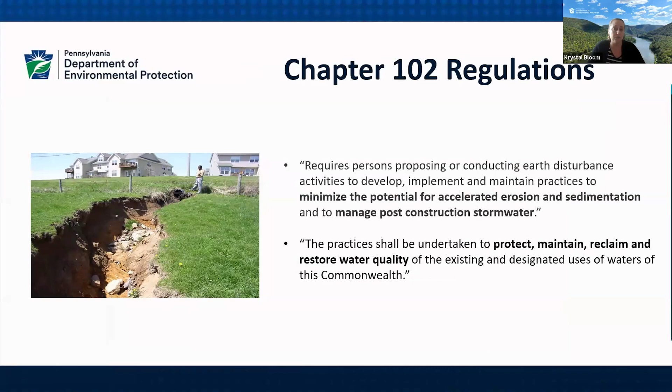So the first goal of Chapter 102 is to minimize accelerated erosion and sedimentation caused by earth disturbance activities. So what's so bad about a little bit of mud? Sediment is the #1 pollutant by volume in Pennsylvania's streams. It's considered a pollutant for numerous reasons, one of the main concerns being that other pollutants can hitch a ride with the sediment-laden runoff and impact downstream aquatic ecosystems, recreational activities, and human and animal safety. Sediment entering stormwater degrades the quality of water for everyone and everything.

Sediment fills up storm drains, which carry water away from roads and homes, increasing the potential for flooding. Sedimentation can increase the cost of treating drinking water and can result in odor and taste problems. Sediment deposits in rivers and streams can alter the flow of water and reduce water depth, which makes navigation and recreational use more difficult and less appealing.

In addition, algal blooms and sediment-laden streams also prevent animals from seeking food. Murky water prevents natural vegetation from growing in water, which affects the food chain. Sediment can clog fish gills, reduce resistance to disease, lower growth rates, and affect fish egg and larvae development. Sediment in stream beds also disrupts the natural food chain by destroying the habitat where the smallest stream organisms live, which can cause fish starvation.

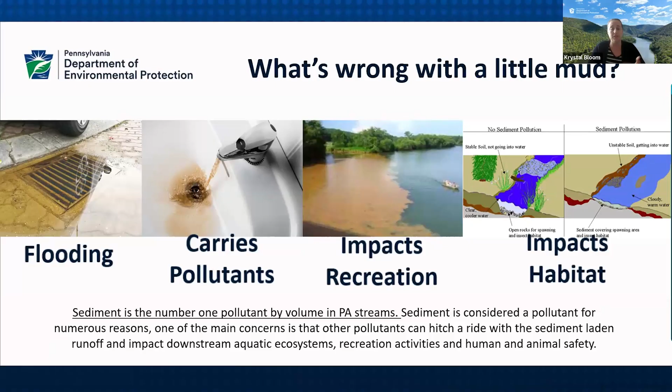Sedimentation of a stream bed can cause the water to be shallower, the water warms up, and then actually holds less oxygen for aquatic life to survive. So in summary, preventing erosion and sedimentation during construction can help prevent all of these things from happening.

So with certain exceptions, Chapter 102 and federal regulations require National Pollutant Discharge Elimination System, or NPDES, permits for construction projects that involve at least 1 acre of earth disturbance over the life of a project. So what is meant by life of the project? You probably have also heard this referred to as Common Plan of Development, which is a contiguous area where multiple construction activities may be taking place at different times on different schedules under one common plan. Common Plan of Development is important to prevent circumvention of the regulations and permitting, thus helping to ensure proper control of stormwater generated by the site activities.

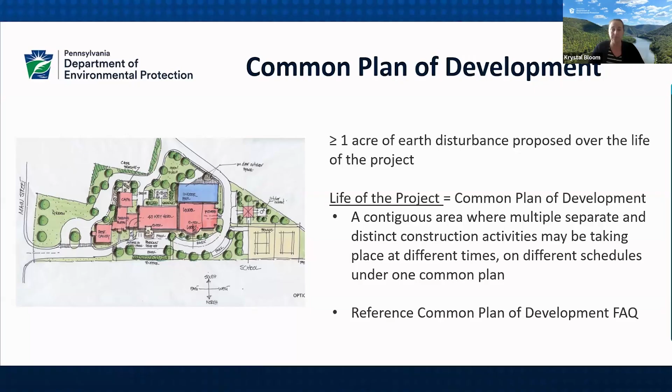There are 2 types of NPDES permits, general and individual. General permits are issued on a statewide basis every 5 years, and applicants seek coverage under those statewide permits. Individual permits are issued on a project-by-project basis with permit conditions that may be specific to that project site.

At this time, there are 3 construction stormwater NPDES permits that could be used for housing development projects. The first NPDES permit is known as the PAG-01 General Permit. The PAG-01 was issued for the first time in 2022 and is intended for small projects under 5 acres of earth disturbance, such as a single-family home, that are expected to involve low environmental risk.

The PAG-01 has a simplified application process and shorter application review period than any other NPDES permit. However, there are specific eligibility requirements that must be met in order to obtain coverage under this general permit, such as limits on the amount of impervious area. Everyone with PAG-01 coverage is subject to the same terms and conditions, including the current expiration date of February 28th, 2027, regardless of when permit coverage is granted. That's the case for all general permit coverage. They expire at exactly the same time.

Now, the second permit might be one that you guys are all a little bit more familiar with, and that is the PAG-02 General Permit. The PAG-02 General Permit was reissued and went into effect on December 8th, 2024. Similar to the PAG-01, the permit conditions and expiration date of December 7th, 2029 are the same for everyone covered under the PAG-02. Again, this general permit also has specific eligibility requirements to qualify for coverage.

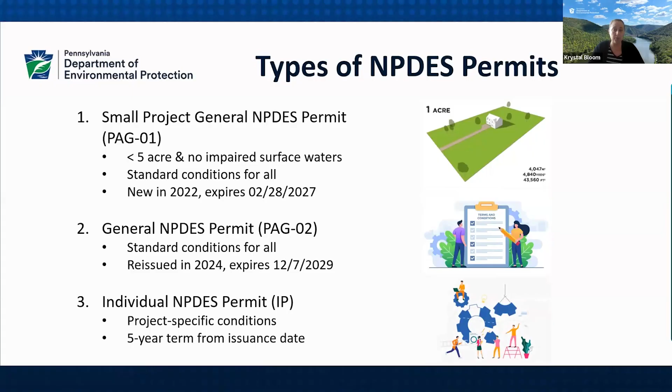Which brings us to the third permit type, the individual NPDES permit. So unlike the general permits, this permit is issued on an individual basis. Note that there are more individual NPDES permit types outside of the Chapter 102 Construction Stormwater Program. Those other NPDES permit types cover things like sewage, industrial stormwater, but there is only this one permit for construction stormwater. So when we're talking about the individual permit from a 102 perspective, this is the one that we're talking about. This permit has similar standard conditions that are within the general permits, but may also have other special conditions based on the environmental conditions and proposed activities at the site.

There are several reasons why a project may have an individual permit, but generally, if a project does not meet the eligibility requirements of the 2 general permits, they will need to apply for an individual permit. The most common reason for this is because the project is located in a special protection watershed, and the second is probably site contamination. In addition, an individual permit is issued with its own permit term, which is 5 years from the date of issuance.

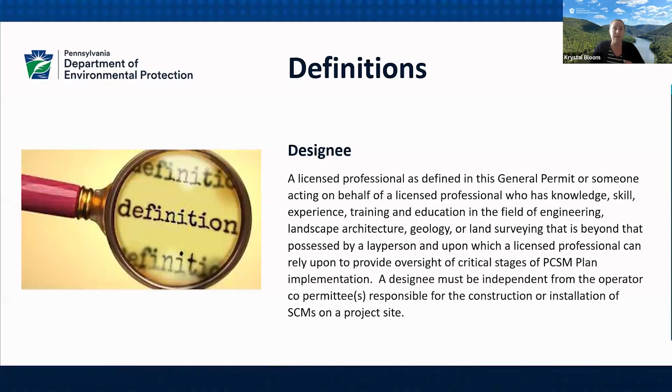The permit also states that the designee must be independent from the operator co-permittee responsible for the construction and installation of SCMs on site. So essentially, this means that if a licensed professional is going to designate someone to provide the oversight of critical stages, it has to be someone that has knowledge and training to do so, and that person must be independent of the folks completing the installation. Basically, we're just trying to avoid the situation where somebody is essentially checking their own work.

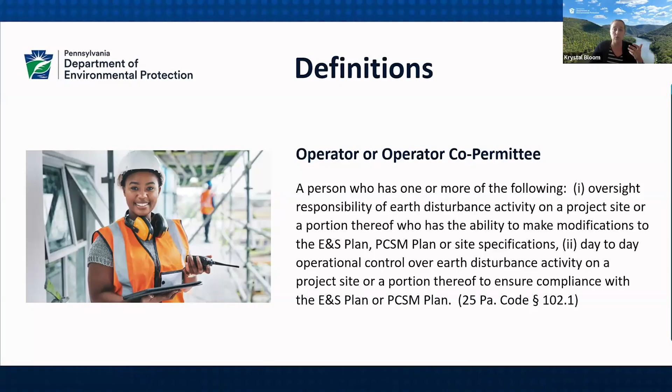Another definition that we've added is operator co-permittee. So previous permits referred to both an operator and a co-applicant as simply co-permittees. The operator co-permittee definition now distinguishes between the two terms and is specific to operators who become co-permittees because of the work they're conducting on a project site, whereas co-applicants are those that actually have their name on the permit. So if somebody is an applicant co-permittee, their name would be on the permit. If they're an operator co-permittee, then they are obviously responsible while they're on the site, but their name is not on the permit itself.

The DEP has also included definitions for record drawings. Under the 102 regulations, record drawings must be provided to the responsible party identified to carry out the long-term operation and maintenance of stormwater control measures, or SCMs. DEP has defined the term to ensure permittees understand what is expected for record drawings. In addition, record drawings also have additional uses under the permit, as we'll discuss later in the presentation.

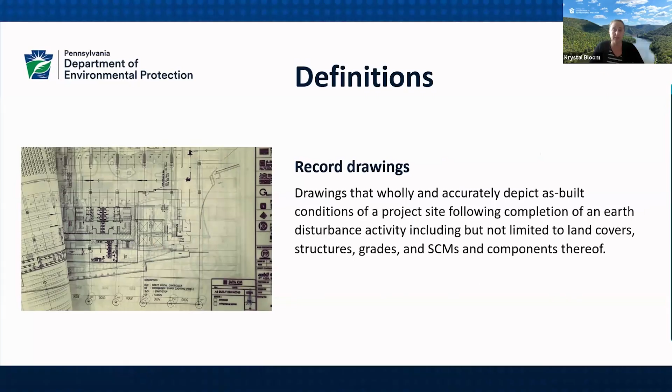Sorry about that. So permit requirement updates also include additional guidelines for construction dewatering discharges. These discharges would include those from the dewatering of trenches and excavations, but they do not apply to discharges from basins or traps. The goal of the dewatering requirements has always been to ensure that discharges from dewatering activities are treated before they reach the surface water.

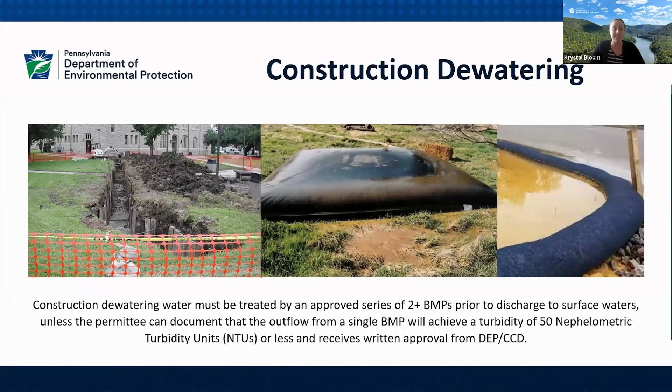This can be done by utilizing upland vegetated areas of the project site to infiltrate construction dewatering water. If this condition is not available, the dewatering discharge would need to be treated with an approved series of 2 or more BMPs prior to discharge to surface waters. However, if the permittee can document that the outflow from a single BMP will achieve a turbidity of 50 NTUs or less, they can request written approval from DEP or Conservation District. This new requirement aligns with EPA's Construction General Permit, which is why this was included.

There is also a new requirement for post-construction testing to determine whether as-built infiltration rates for infiltration SCMs are within a tolerance range of the design infiltration rate. This confirmation testing became a requirement as of December 8th, 2025. So this testing is necessary anytime the area of an infiltration SCM has not been protected, say, for example, the area was compacted. The licensed professional is expected to make this determination, but DEP or a conservation district may also direct the permittee to conduct testing if they believe there are concerns.

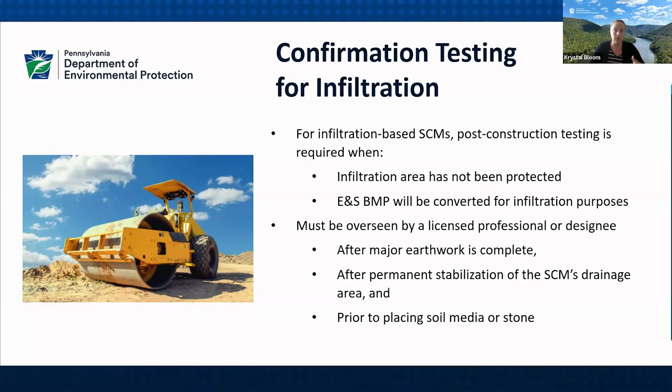The construction confirmation testing for infiltration capacity can be performed generally one of 3 ways: either a simulated runoff test using a ponded depth of no less than 6 inches within the SCM, an inspection during and after a storm event that produces a ponding depth of no less than 6 inches within the SCM, or infiltration testing using acceptable methods from Pennsylvania's Stormwater BMP manual as amended and updated. Yes, that includes the future finalization of the PCSM manual. Note that while percolation tests are in the Stormwater BMP manual, DEP does not consider a perc test an appropriate method for confirmation testing.

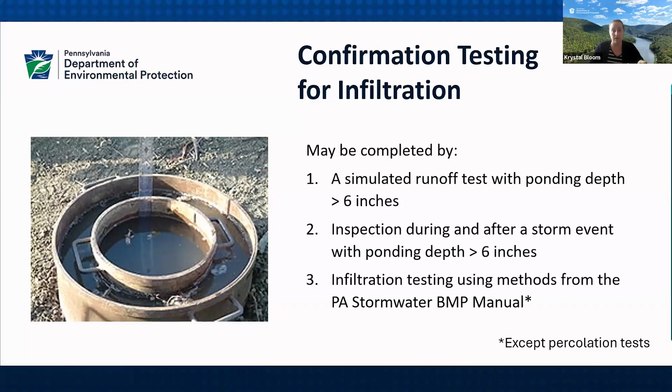With confirmation testing, the licensed professional must evaluate the confirmation testing results and notify the permittee that the infiltration SCM meets the purpose and intent of the approved PCSM plan without overflowing at the storm event the SCM is designed to manage and will protect waters of the Commonwealth. The permittee should not proceed to complete construction of the SCM until this notification is given.

In the event the licensed professional determines that the SCM will not function as designed, the permittee must then implement corrective measures under the direction of the licensed professional and retest prior to the completion of the SCM. If the licensed professional recommends changes to the dimensions, location, or type of SCM, the permittee must notify DEP or the Conservation District prior to implementing the changes.

These confirmation testing results must be submitted with the SCM construction certification form, which we'll get to in a few minutes. But because this is a brand new requirement, I very much urge you to read the requirements that are laid out in the permit conditions, as well as reviewing the instructions that come with the SCM construction certification form. We've done our best to try to make these new requirements as clear as possible.

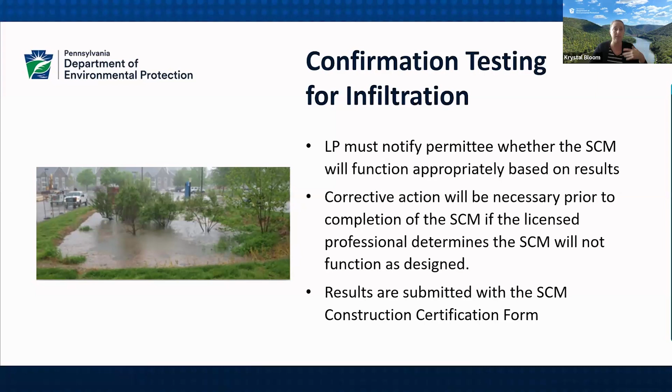So next, we're going to start by discussing some of the updated or new forms that came about due to the permit changes related to the 2024 PAG-02. In some cases, the form updates are not associated with changes in the permit requirements, but rather to provide some clarity to simplify or assist in the process. We'll touch on a few of these updates today, but for more information, please refer to the lessons that are available in Clean Water Academy, because there's a lot, right? So we're not going to have time to take a deep dive into all of them.

All right. So as of December 8th, 2025, those completing the VSIR need to be qualified. This change was made to ensure consistency with EPA's construction general permit. The 2024 PAG-02 includes a requirement for site inspections to be conducted by qualified personnel. There are 3 options to demonstrate qualification to conduct site inspections. The first is completion of the Qualified Site Inspector Training Program within DEP's Clean Water Academy. This training will need to be completed every 2 years.

Second, if you hold a valid CPESC or CSSWI certification, that can be presented as a qualification also. Lastly is submission of documentation of training and experience to the permitting agency, which would require written approval prior to conducting site inspections. So it's important to note that for those that complete VSIRs for PennDOT, the department's QVSI course will need to be completed along with the additional PennDOT module, and PennDOT will not accept alternative qualification. So if you're going to be conducting those VSIRs for PennDOT, then you need to take the Qualified Site Inspector Training Program on Clean Water Academy.

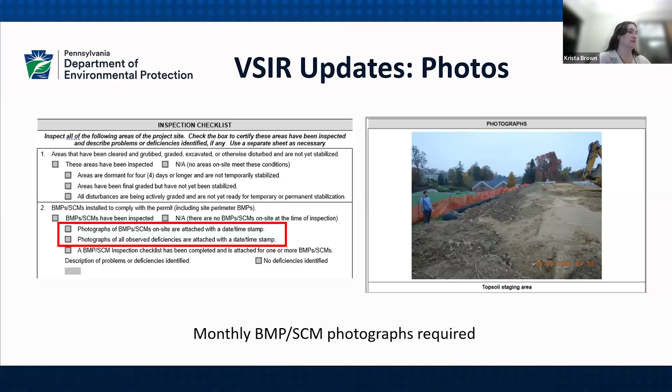Okay, so several updates were also made to the visual site inspection report itself. One of the more significant changes is the requirement to take colored photographs of all E&S and PCSM SCMs on the project site at least monthly, and when deficiencies in BMPs and SCMs are identified. While full exemption to the photo requirement will not be entertained, it may be possible to develop an alternative photo schedule based on the conditions of the site. This request must be made in writing to the Conservation District for approval. Keep in mind, if this alternative is approved, it can be rescinded by DEP or the district at any time if non-compliance is observed. Notification will be provided to the permittee in writing if this ends up being the case.

Another update we would like to touch on in more detail is a change to the procedures for co-permittees. So those that meet the definition of an operator under 102.1 are considered co-permittees under 102.5(h). So previously, co-permittees were acknowledged and removed via a co-permittee acknowledgement and release form. Permittees covered under the 2024 PAG-02 and new IPs or those with updated permit conditions after December 7, 2024 will no longer submit these forms. Rather, they will identify operators that come and go via the visual site inspection report. For PAG-02s and IPs that were issued before December 8, 2024 that haven't been revised or modified, co-permittee acknowledgement and release forms will still need to be submitted, but these forms will eventually be retired once their use is no longer required by these permit types.

So the 2019 PAG-02 General Permit required recording of a legal instrument for disclosing PCSM SCMs within 45 days of permit issuance. Proof of the submission was required to be provided with the Notice of Termination, or NOT, or transfer application if applicable. However, what we were finding is that this just wasn't happening. People were not completing the recording, and we weren't finding out about it until the NOT time.

So now the full recording and proof of recording will need to be provided to the office that approved coverage prior to scheduling the pre-construction meeting, with the exception of projects conducted for the benefit of a public utility as defined in the Public Utility Code and other projects that receive prior written approval from DEP or a county conservation district. For utility projects and others with prior written approval, the instrument recording must be completed within 45 days of permit issuance. Once submitted, the information will be reviewed to ensure all the required information was included in the recording.

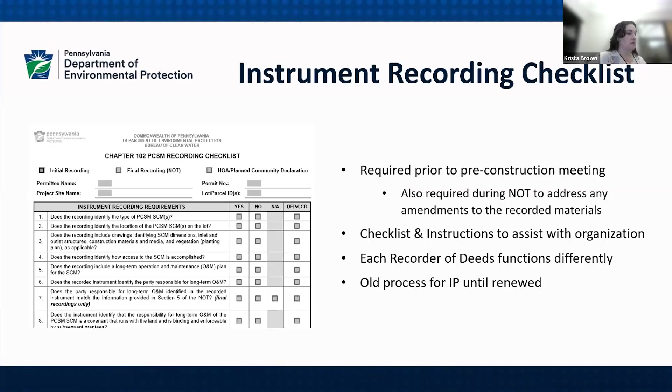NPDES permits associated with earth disturbance activity now require submittal of an annual report. The new annual report form is short but useful, as it will assist with the tracking of a project status as well as speed up permit terminations. As we have been saying, this reporting requirement will also apply to new individual permits issued after December 7, 2024, and eventually existing individual permits upon renewal or major amendments issued.

The reporting period for existing permittees will be October 1st to September 30th of each year within the permit term. However, new permittees will have at least one full year of permit coverage before the requirement to submit an annual report begins. The permittee must submit an annual report form to the permitting agency on December 7th of each year. For those of you that had PAG-02 permit coverage before December 8, 2024, your first annual report was due this past December 7th. So if you haven't submitted it yet, please do so.

All right, next up, we have the SCM construction certification form. This form is to assist with project status and permit termination. Again, a lot of these things were put in place to try to make sure that when it came to NOT time, we have all the information that we needed to gather throughout the life of the project. So this form requires a licensed professional or designee to report on the installation of stormwater control measures, including inspections conducted and whether the SCM will function as designed.

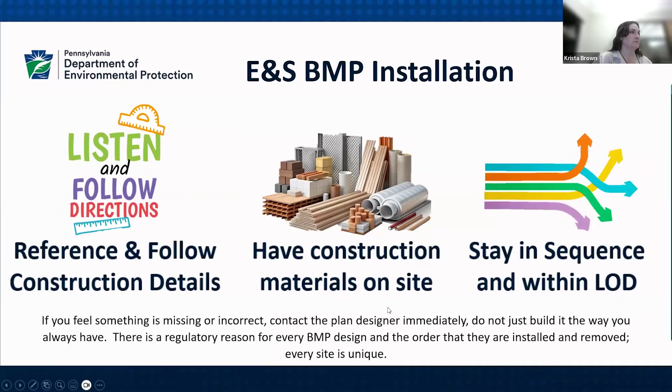The same standards that we just discussed also apply to the PCSM installation. Reference and follow your construction details, stay in sequence, and make sure all materials are on site and ready to go. There are other factors to think about to stay in compliance with the PCSM plan. Many involve thinking ahead to avoid additional costs and delays.

Know where your proposed infiltration areas are located before accessing the site. Most likely your plan required the marking of these areas so they don't end up compacted. Compaction of infiltration areas causes the need for confirmation testing, as Krista discussed earlier. So this adds cost and time to the project and could also limit what can then be built on site. In addition, the PCSM plan also proposes non-structural SCMs that you may not even be aware of.

So these can be as simple as protecting a forested area or natural stormwater conveyances. These practices seem simple, but that is the point, right? The permittee is getting credit for doing the right thing and preserving beneficial features. If these features are impacted, it could cause the need for the redesign of the entire PCSM plan, which will cause project delays and additional costs.

The licensed professional or their designee must be on site during the implementation of critical stages. So it is important that there is a plan in place to get the LP on site as soon as possible to prevent construction delays.

Before your contractor leaves the site, be sure that the SCMs that they installed actually function per the plan. Ensure that required confirmation testing has been completed and that the LP has signed off on the SCM certification. But keep in mind that the SCMs will need to be maintained until the responsibility can be transferred at the time of NOT approval.

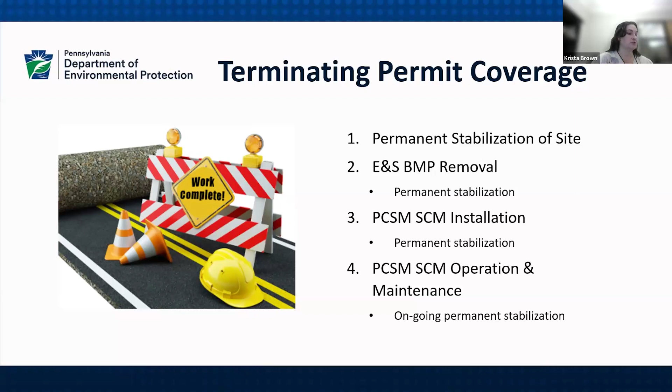The NOT and attachments are first reviewed for completeness and consistency with the approved plans and permit. As with most forms, there is a checklist which assists the permittee in providing a complete NOT submission. Detailed instructions are also provided with the NOT form, providing guidance to get the application complete with the initial submission. Revised recording is required if there were changes to the responsible party or the SCM type, design, drainage area, impervious area, or operation and maintenance requirements.

If the NOT is found to be incomplete, the permitting agency will provide a letter with the deficiencies that need to be addressed before the NOT process will continue. However, just as during the permit review, if there are minor deficiencies, the permitting agency may still choose to schedule the final inspection with the intention that the issues will be quickly resolved.

A final inspection will be performed as part of the NOT review. It is best for the permittee, co-permittees, and licensed professionals to be present during the final inspection. Be prepared to support installation and stabilization and function of PCSM SCMs at the inspection. So for example, if you have a spray irrigation system, be prepared to support that the spray heads actually spray.

So the inspector is also there to confirm that all E&S BMPs have been removed. If they have not, you will most likely fail your inspection unless you can remove them in real time and don't need to stabilize anything, and will need to remove those BMPs, repair and stabilize the areas if needed. You would then need to contact the permitting agency again, once those areas are stabilized, to come out for a follow-up final inspection. So an inspection report will be issued regardless of whether issues are found.

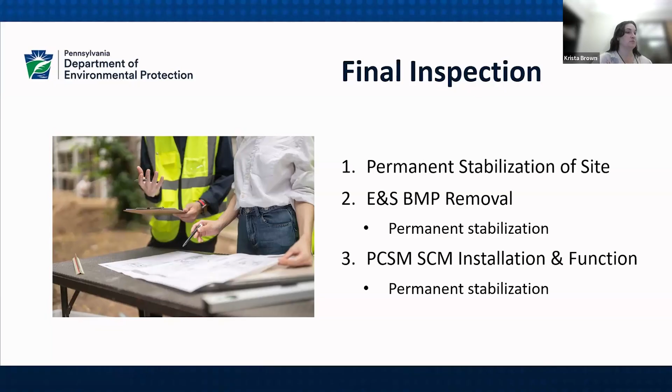All right, so helpful tips for the NOT. So first tip is similar to the previous forms. Read the instructions and use a checklist for every NOT submission. We have all these checklists created to try to make it as easy as possible. So they're available. Make sure you're using them. These documents are there to let you know what the reviewer is looking for and to find the submission complete. Incomplete submissions cause delays. Another complication for NOT acknowledgement is the weather conditions. So a final inspection typically cannot be performed in the winter.

Snow cover can hinder the ability to confirm permanent stabilization, and some SCMs require winterization, and thus the permittee cannot support functionality. Not to mention, if any disturbed areas need to be fixed, right, you can't grow anything in the winter. So tip number 2 is to shoot to complete your project during the growing season. That way the NOT process can continue right into a final inspection, and adjustments can be made if they are

needed. If the NPDES permit will expire in the winter, you should plan to renew your coverage so you can terminate during the growing season. But keep in mind, annual reporting and annual fees remain due until the NOT is approved.

The third tip is to complete the record keeping and reporting as you go. So throughout the life of the permit, right? Don't wait until the end of the project. There are timelines in place for submittal of the documents, such as within 30 days of SCM completion for SCM construction certification form. These timelines are in place to keep your permit moving smoothly.